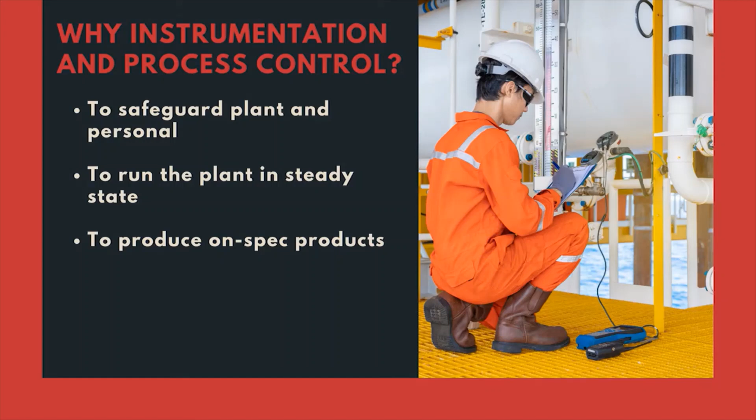What are the units of measurement in process plants? There are 4 basic units that are very vital in any process plants, including petroleum refining. That is temperature, flow, level, and pressure. These are the basic measurement parameters in any process plants. Assume that there are 1000 instruments, almost 90% of the instruments will be measuring any one of these parameters like flow, temperature, pressure, and level.

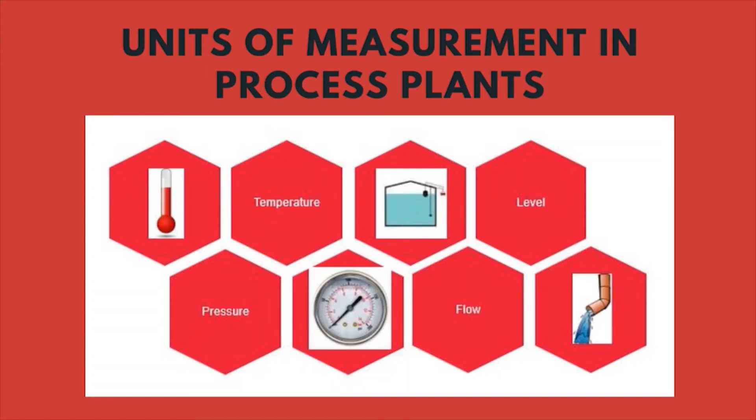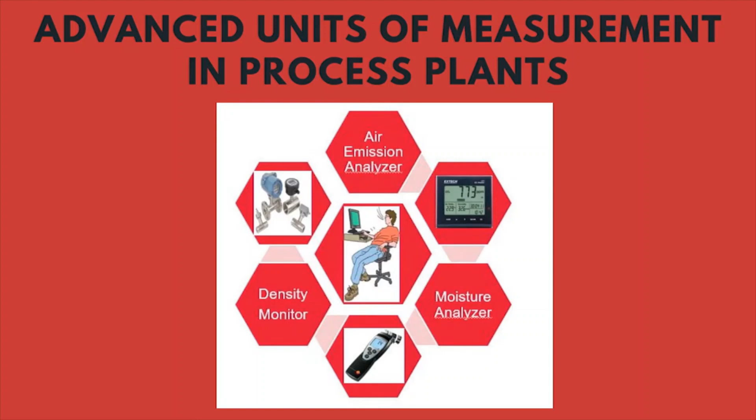There are some more parameters that are being measured in a continuous fashion with the help of instruments. So, for example, it can be online density monitoring, or air emission analyzer, or moisture analyzer in your product. So, these are all slightly special instruments, while the previous instruments to measure flow, temperature, pressure, level, they are all very generic in nature. So, in any process plant, lot of complexity would be there. There will be multiple parameters that will be critical in deciding the product flow as well as the product quality. Definitely the process parameters need to be monitored.

For example, this is a boiler feed water drum, and the water is coming from an upstream unit in a continuous fashion. And in this particular drum, the heating steam is admitted, and finally the dissolved gases are vented out, and finally the water which is free of gases is pumped to the boiler. So this is a continuous process. As long as it reaches steady state, you need not bother about measuring the process parameters. But obviously there will be a lot of disturbances and external variations wherein the process parameters need to be continuously monitored with the help of instruments.

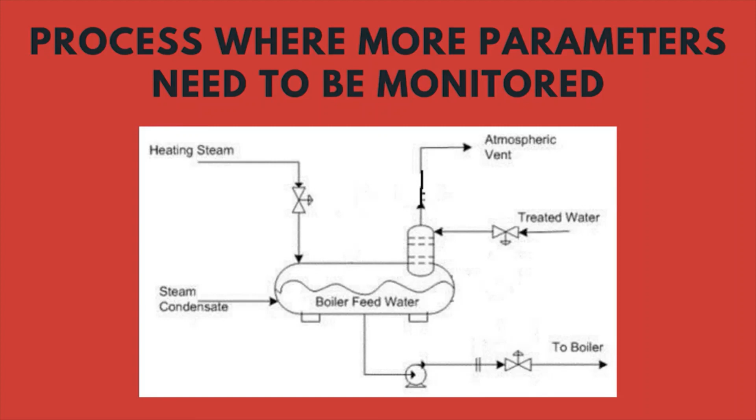Now if you see here, there are a lot of instruments put into the same system. For example, the treated water flow is primarily the function of a level controller in the boiler feed water drum. So, if the boiler feed water drum level is dropping, then the control valve will open and it will admit more water into the drum. The pressure in the drum is regulated by the flow of the steam. So, you can see the instrument regulating the flow of the steam.

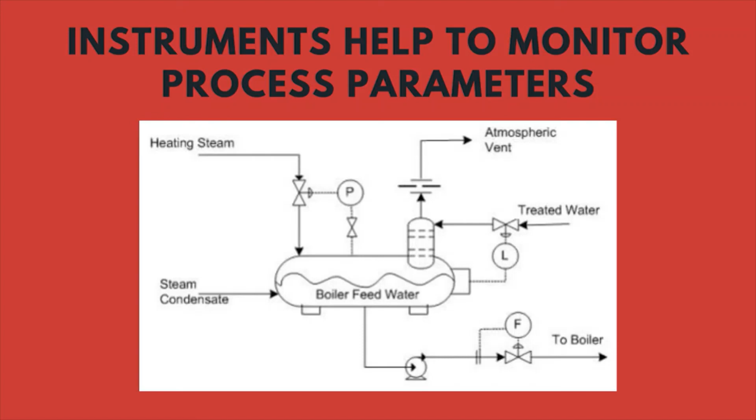There are 3 control valves and 3 different instruments. One is the flow instrument, which is regulating the water going to the boiler, and then a level controller is regulating the flow of the water, and the pressure of the drum is controlled by the flow of the steam. So, this is how the process parameters are monitored as well as regulated, and this is one of the simple examples.

Now, let us try to understand what is known as open loop and closed loop in instrumentation.

So, in the top picture, there is a pump, and the pump is pumping from upstream to the downstream in a continuous fashion, and the flow is monitored, and the process parameter, which is known as process variable PV, is going to the control room.

So, assume that there is a disturbance in the upstream unit or downstream unit, and obviously there will be change in the flow. So, assume the control room operator is monitoring this variation in the process flow and is asking the field operator to regulate the valve to maintain the flow, then it is known as open loop. Here the measurement is only coming in a one-way direction to the control room, and which is conveyed manually to the field operator. Now, let us see the second scenario where a little more complexity is added.

Here also you have a flow sensor, and it is measuring the flow of the stream, and the process variable is not directly going to the control room. It goes through a process controller and finally reaches the control room operator. The process controller is nothing but a microprocessor, and the microprocessor also receives another input from the control room operator known as set value or SV.

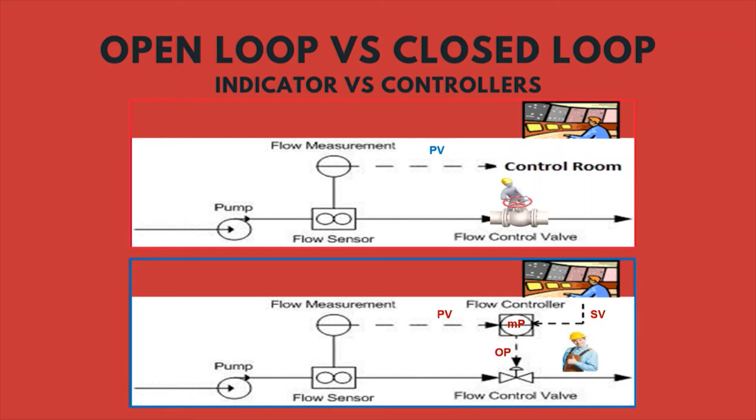Here in this case, the process variable comes from the field to the control room, and the set value comes from the control room to the microprocessor, and finally the output goes to the control valve. So, this is why it is known as a closed loop, whereas in the previous case it is just one-way traffic, and it is known as open loop. So, the first scenario can be called just an indicator, whereas the second scenario is an example of the controller.

So, in a petroleum refinery, so many process parameters need to be monitored, and as I said earlier, pressure, flow, level, temperature, and for all that different kinds of instruments will be deployed. And as a field operator, it is his job to note down all these readings at a set periodicity. For example, once in 2 hours or once an hour, he has to take a logbook and note all these readings to ensure that the plant is not upset and the plant is running in steady state condition. And this is how so many instruments will be there.

So again, when I meant instrument, it will have a lot of subcomponents, starting with the sensing element, microprocessor, final control element, and a current to pneumatic converter. So the loop will include several small components inside the instrumentation loop.

A long time back, that is 3 to 4 decades back, before the advent of computerized process control systems, most of the continuous process units used to have an analog control room. In an analog control room, all the instrument readings will be displayed in the control room, again with another set of user interface. For example, with the help of a dial gauge, we will be able to see the level in the boiler drum. With the help of a recorder chart, you will be able to see the trend of critical parameters like reactor temperature, etc.

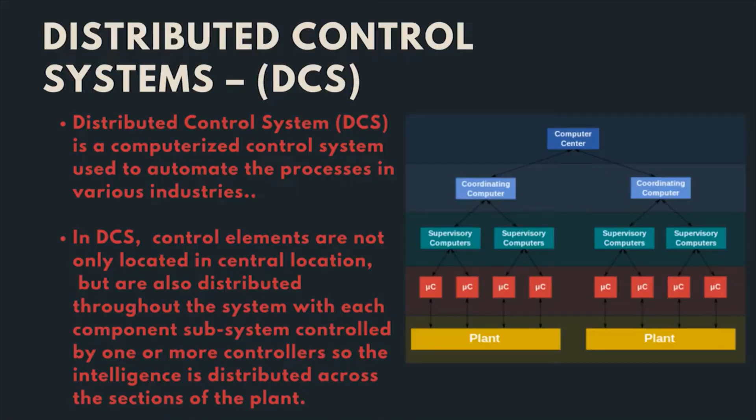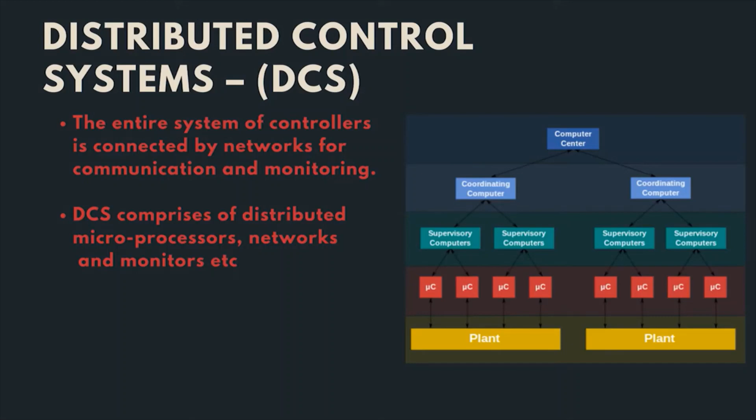In DCS, the control elements are not only located in the central location but are also distributed throughout the system, with each component subsystem controlled by one or more controllers. So the intelligence is distributed across the sections of the plant. So let us see in detail the different features of the distributed control system. The entire system of controllers is connected by networks for communication and monitoring. DCS comprises distributed microprocessors, networks, monitors, etc.

Not only that, the modern control room also gives a provision to integrate with external parameters like the weather conditions. They are all displayed on a dedicated screen. So these are some of the important features of the modern control room. Now let's try to understand the different features of the DCS system. The very first feature is known as the graphics page.

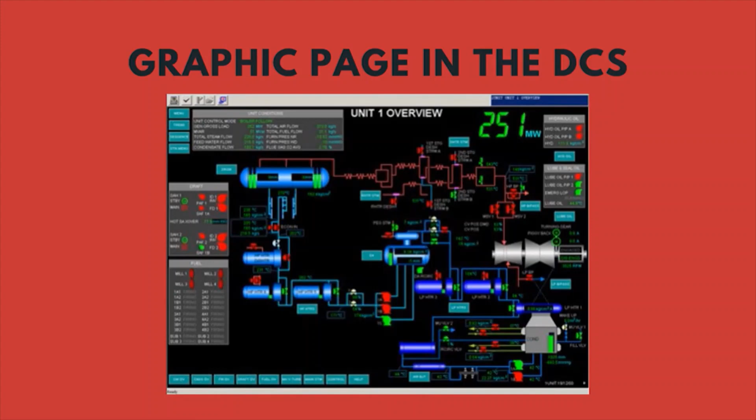By seeing these color codes and the process flow symbols, known as P&ID symbols, process and instrumentation diagram symbols, you will be able to get a complete insight into the process plant. So this is a vital aspect of a distributed control system. The second feature is the trend page, or the real-time trend page.

Many times the real-time trend page will show you 8 different parameters at a given point of time. By seeing this page, the operator will be able to see whether any of the process parameters is taking a deviation or a detour. If all the lines are straight and within the design conditions, then the control room operator will assume the plant is running smoothly.

There are additional features available: the operator can move the cursor from left to right to understand the parameters at different points of time, and he can see the disturbances that happened a couple of hours back and the current parameters, and if he wants, he can switch off any of the other parameters.

For example, in this page, as I said, 8 different parameters like 2 flow indicators, 1 level flow controller, 1 level indicator, 1 temperature controller are shown. But if the operator is not able to distinguish between these parameters, he can switch off some of them so that he can clearly see the parameters, and he also has a magnifying feature in the trend page.

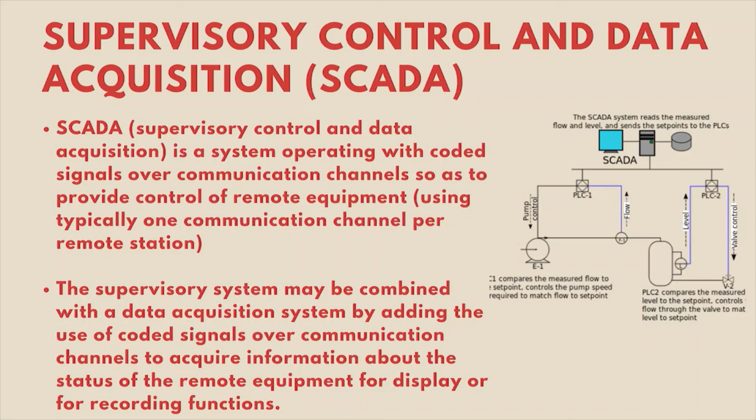There are specific sets of systems on top of your DCS systems known as safety instrumented systems. Generally these are all add-on systems on top of the traditional process control instrumentation. These are primarily divided into PLCs and ESDs. PLC stands for Programmable Logic Controllers, and ESD stands for Emergency Shutdown Devices.

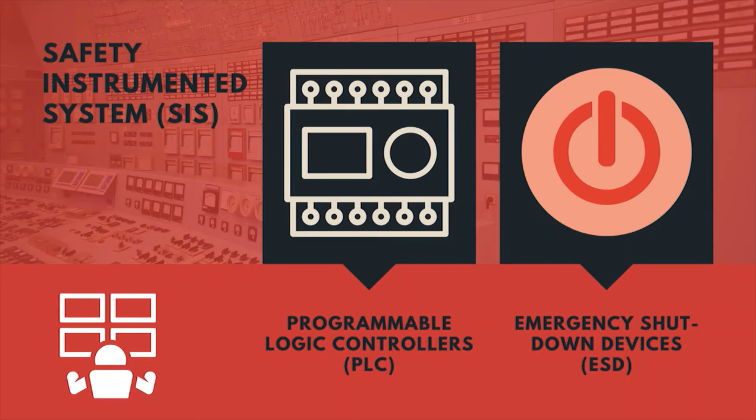A Programmable Logic Controller is a digital computer used for automation of typically industrial electromechanical processes. PLCs are designed for multiple analog and digital input and output arrangements, extended temperature ranges, immunity to electrical noise, and resistance to vibration and impact. A PLC is an example of a hard real-time system, since output results must be produced in response to the input condition within a limited time.

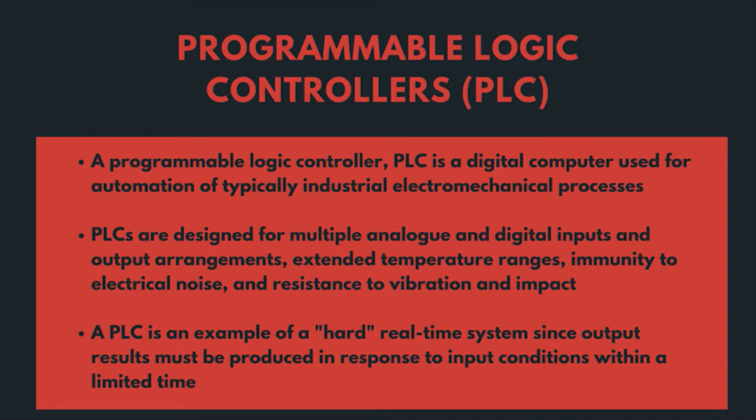Let me elaborate a little more on PLCs. While the distributed control system measures the pressure of the compressor system, the flow of the compressor discharge, the level in the knockout drum, and the flow of the compressed gas, etc., the programmable logic controllers primarily take care of the safe operation of the compressor.

For example, whenever the level in the knockout drum exceeds, an alarm will immediately be generated, and if the alarm is not taken care of and further alarms are triggered, the programmable logic controller is going to safely shut down the compressor. Otherwise, the process control parameters will deviate and the entire plant will be upset, which can result in a safety incident. So in order to protect the equipment, the plant, and the operating personnel, the PLC will trigger a mechanism to safely shut down the compressor or a furnace.

Emergency shutdown systems also have PLCs, but they are very specifically designed on cause and effect. For example, if the compressor knockout drum level goes up, the liquid will carry along with the compressed gases, which will upset the entire plant in the downstream segment. So based on every cause, there will be multiple effects.

For example, if the coil outlet temperature in the furnace goes beyond 370 degrees centigrade, the crude oil will get coked up in the furnace. It is also going to upset the distillation column. So there are several other effects for a single cause. Based on this cause and effect diagram or matrix, the emergency shutdown system is going to trigger multiple actions appropriately.

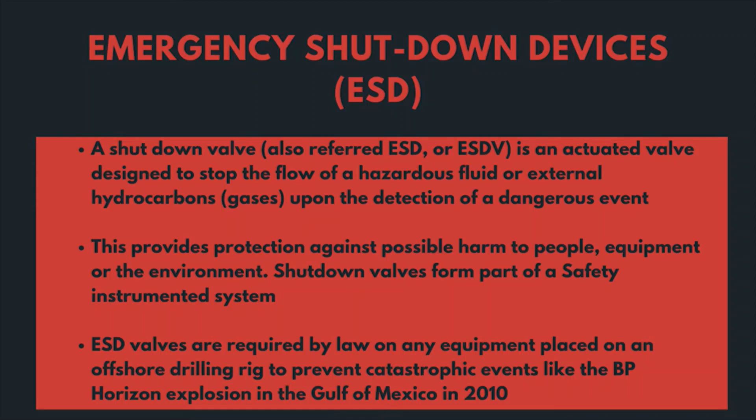Emergency shutdown valves are required by law on any equipment placed on an offshore drilling rig to prevent catastrophic events like the one that happened in the Gulf of Mexico in 2010. When we talk about safety, it is not limited to upstream, midstream, or downstream. Even in a refinery, the temperature goes up to 700 degrees and beyond in a fluid catalytic cracking unit, and the pressure goes to more than 100 atmospheres in a hydrocracking unit, so emergency shutdown systems are definitely mandatory in a refinery.

When we talk about process control instrumentation, it is also essential to know the important vendors who are offering such systems. Some of the plant automation vendors who are in this field for several decades are Honeywell, Yokogawa, Rockwell Automation, Invensys, ABB, Emerson, Schneider, etc.

So generally it is believed that the process parameters are essential for control room operators for the safe operation of the unit. Yes, agreed. But the process parameters are also essential for certain other stakeholders, like the process engineers or the engineers working in the optimization department or the planners and schedulers.

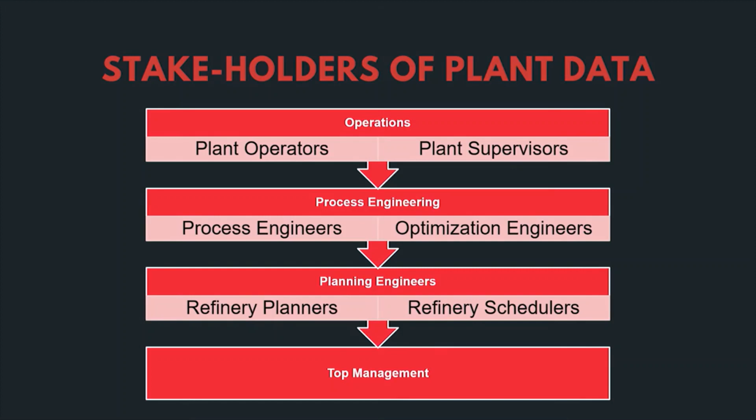Only based on the crude throughput in the refinery as well as the production make, the planning engineer will be able to come out with the planning and scheduling for next 6 months or 3 months or monthly planning and scheduling. Similarly, the process engineers also need to know about the flow, temperature, pressure, etc., because their job is to safeguard the equipment in the long run.

Generally, these other stakeholders who are not control room operators used to visit the control room and take down the process parameter readings, and then they go back to their respective department and get involved in their core activities. This is a cumbersome activity. They have to collect so many details.

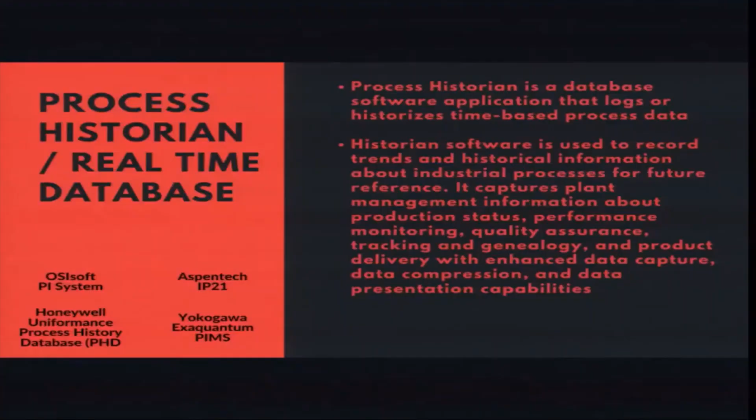So in order to address this, there are certain companies who are now offering the process historian or real-time database. The process historian is a system that sits on top of the DCS system and which will help the process parameters to get disseminated to different stakeholders. It is a database software application that logs or historizes time-based process data. Historian software is used to record trends and historical information about industrial processes for future reference.

It captures plant management information about production status, performance monitoring, quality assurance, tracking and genealogy, and product delivery with enhanced data capture, data compression, and data presentation capabilities. For example, the process engineer wants to know on a Monday morning what has happened to a particular reactor temperature in the last 48 hours. He will be able to go through the process historian and figure out how the temperature has undergone different variations in the last 48 hours.

And again, there are several vendors who are very popular in this space. Companies are OSIsoft, they have a product known as PI System. Then there is a company known as AspenTech whose product is IP21. And even the plant automation vendors like Honeywell, Yokogawa, they have their own process historian. For example, Honeywell has got a historian known as Process History Database or PHD, or Yokogawa has got their product known as Exaquantum PIMS.

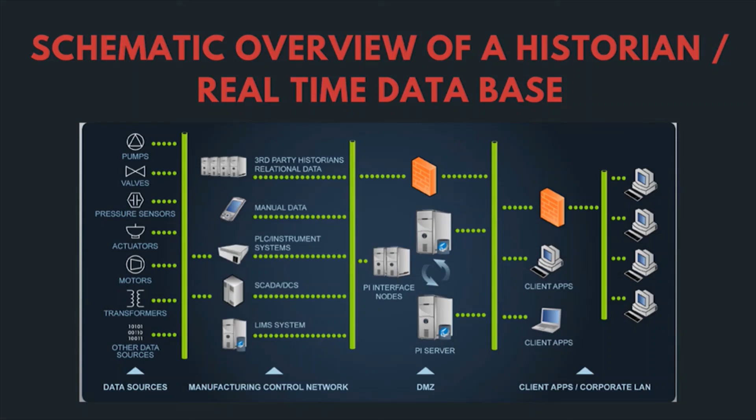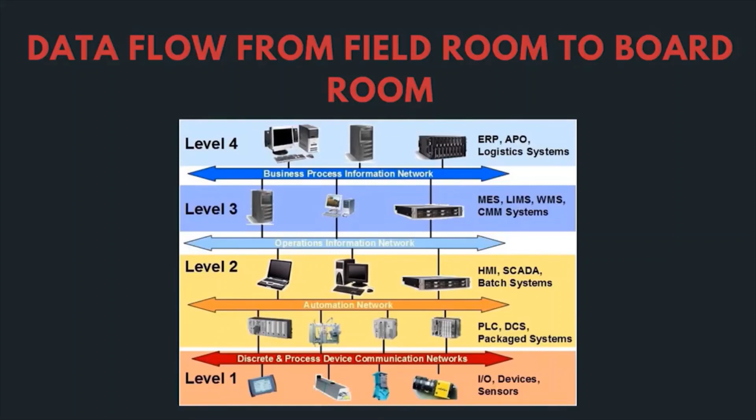This is yet another depiction of how the process data is flowing from the field level to the boardroom level. This is known as ISA 95 architecture. ISA stands for Instrument Society of America. So here in level 1, the field instruments capture the data, and in level 2, we have the PLCs, DCS systems, human machine interface, SCADA, etc., which are collecting the data and putting it into a convenient place where data can be viewed under one single interface.

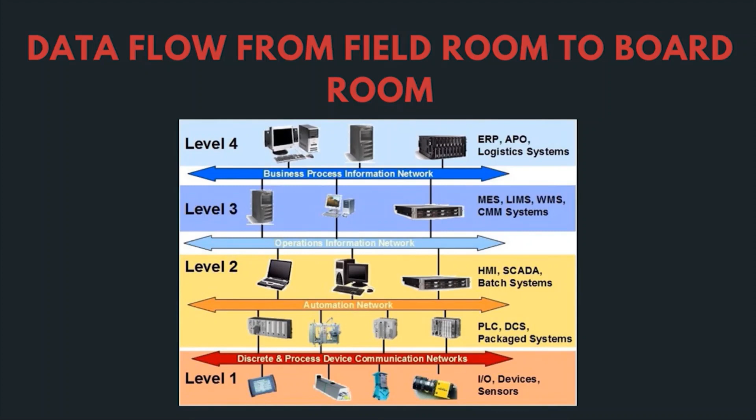Then in level 3, we have the other set of systems like laboratory information systems and manufacturing execution systems. All these collect the data, and in level 4, the data comes from ERP and other business applications. And finally, on top of all this architecture, you will have a real-time dashboard which will disseminate the key process information to the decision makers like the operations manager or the general manager operations, who can also monitor the entire plant from a remote location.

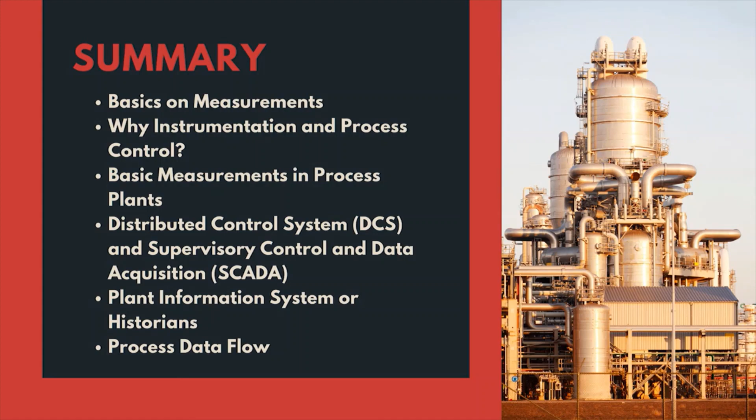So today in this module on process control automation, we have seen the basics of measurement and why measurements are important for process control, and the basic measurements happening in process control plants, and we also went through the different features of DCS and SCADA systems, and finally how the data is flowing from the control room to the different stakeholders using the real-time historian, and the data flow we have seen with the help of ISA 95 architecture. So this is how we are concluding today's session on process control automation.